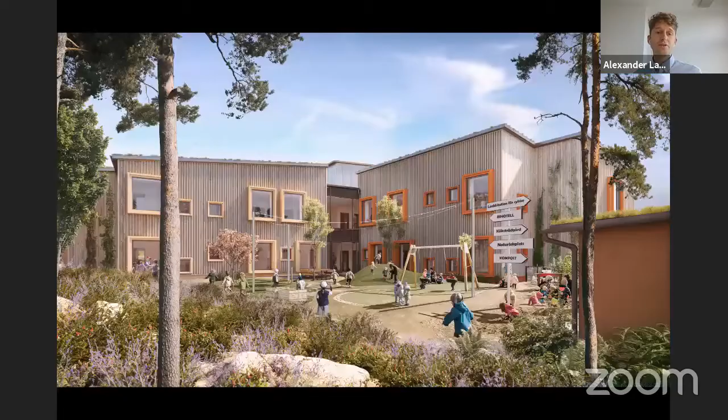And that's one of the reasons why we at Link Arkitektur have focused a lot on timber buildings the last couple of years, because we believe that timber is a renewable material that is a very important part of the building sector of the future. This is one of my favorite projects, which is called Hoppet, which Elsa will talk more about later on. It's an experimental project where they try different types of materials with low carbon emissions. And it's also an inspiration for the rest of the project developers in Sweden. Everybody has their eyes on this project because they want to see what's working and what's not working.

This is another project that we have done at Link Arkitektur, a little store outside Sigtuna. It's mainly built out of glulam timber and also cross-laminated timber. And I think it reminds us also that architecture needs to be beautiful. If you want to have a building that lasts for 100 years or centuries, the architecture needs to attract people for us to love it, to let it stay there. And this is one of the pictures being built right now as we speak.

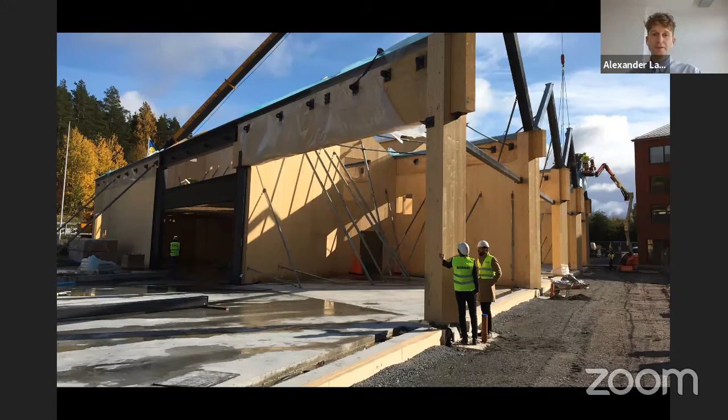And the energy use is something we've been focusing a lot on the last couple of decades, and we've been able to reduce this circle a lot. So what we now need to do is focus on the building materials, because the fact is that we don't know much about how to reduce the climate impact from this part of the building, because there's very little research done on it.

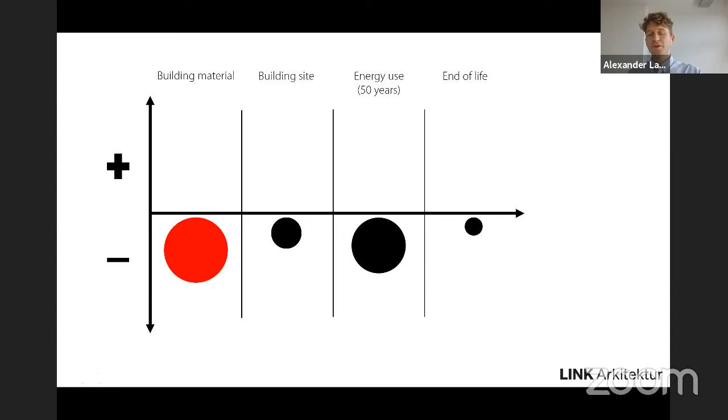So how do we begin doing that? Well, I think a great way is to use the Pareto principle. It states that for 20% of the effort, you get 80% of the results. So I usually don't encourage people to start with everything at once. If you want to build a climate smart building, don't start with all of the building components.

It's the same with sales. Usually 20% of your customers stand for 80% of your income. So this principle can be applied in many things, and it's also true for the climate impact of a building. So you need to focus on the foundation and framework first. Don't ignore these parts, of course not. But if you're just getting started, then you put your energy where you get the most results, where you get the most bang for your buck.

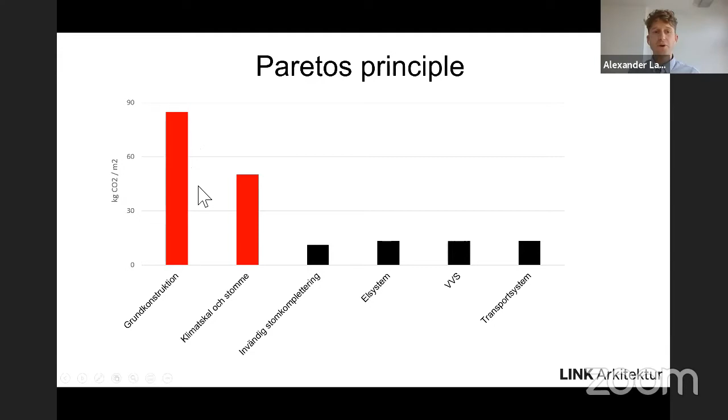And that's exactly what we did for this project. This is Little Visby outside of Gotland, which is Sweden's first NollCO2 certified building. It's almost completely made out of timber. We're using cross-laminated timber, glulam, and we're also using LVL. But there's two things that are unique with the project.

The first thing is that almost all of the materials inside this building have been accounted for and their carbon emissions measured from a product-specific EPD. So we know exactly how much carbon emissions they release. And the second part, which is really interesting, is that we used a carbon budget for this project, the CO2 budget, of 300 kilos of CO2 per square meter. And the same way you use a financial budget or you have a time budget in your project, every project should also have a CO2 budget.

So how do we get the target of 300 kilos CO2 per square meter? Well, in this case, it's taken from a baseline case where a standard building in Sweden has a climate impact of 550 kilos of CO2 per square meter. And then the thought process here is that you almost halve that and you get 300, and that's then in accordance with the 1.5 degrees goal from IPCC. And actually these numbers have been updated since we worked with this project, but this is what we used.

And of course, always when you have a target, you want to have a safety margin, right? So what we did was that we said, okay, we want a 20% safety margin so that we know that we can reach this target or below this target actually. And we far outreached the target. The building had a climate impact of almost 180 kilos of CO2 per square meter, which is a very low climate impact for a building.

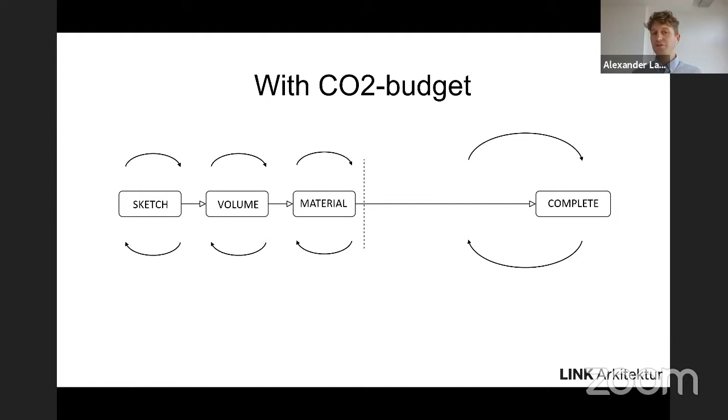And actually, another thing is that the learning process is very low, because the ones that actually can impact the climate emissions are the architect and the construction engineers and the other consultants, and they're not part of this feedback loop. So that's why when you use a CO2 budget, you're forced to do continuous LCA analysis during the project. And you have to ask yourself a question when you start a project: are we able to reach this CO2 goal that we have? If not, well, what changes can we do to our sketch? And that's exactly what we did.

Less materials means lower CO2. Less volume means that we don't need to heat the building as much, or cool it for that matter. So it's a win-win situation.

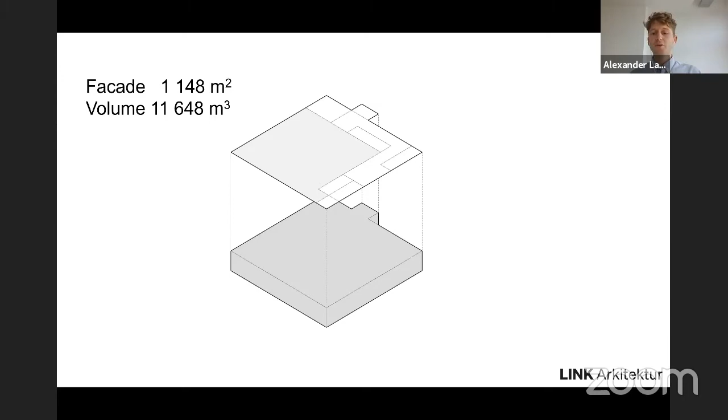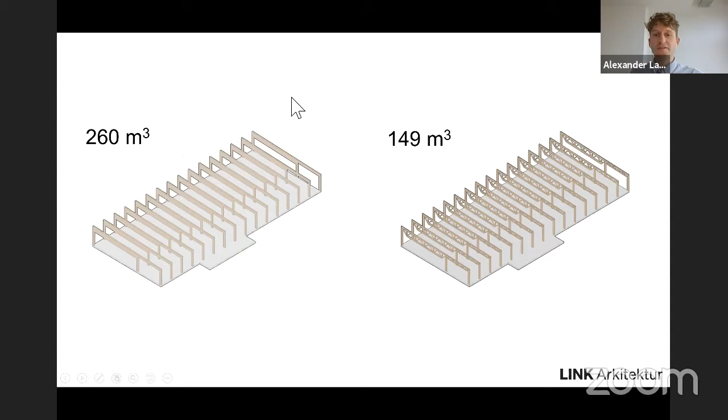I think these types of analysis are amazing if you can do them, because many people believe that climate smart always means more expensive, but actually climate smart and cost efficient are intertwined. I mean, if you reduce the materials, the cost will also be reduced, hopefully. Not always, but in many cases. So that's why they're intertwined, and I think that's important to remember.

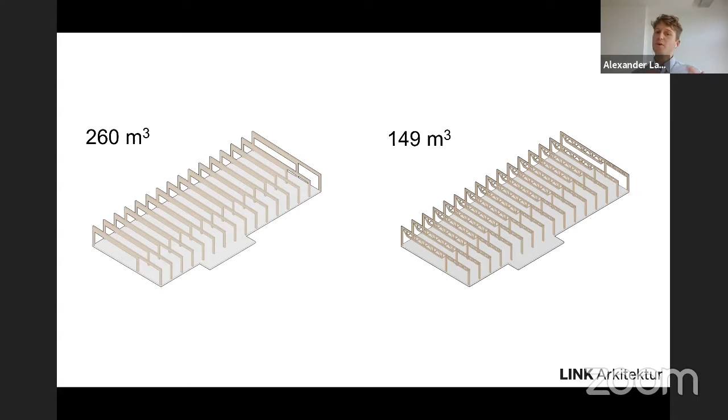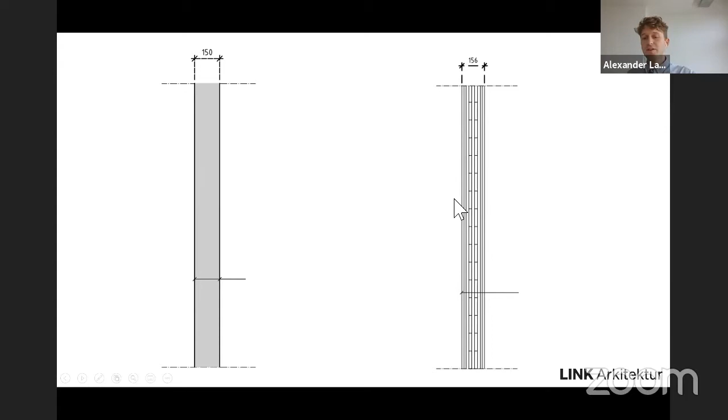This is what a regular type of LCA analysis looks like in many projects. It's very simplified. You have a concrete wall to the left and you compare it to a timber wall to the right. But you can't do this, because there's always materials that need to be added to the different types of constructions, right? So in this case, this is a more accurate analysis where you can see that you need to have a lot of gypsum for the timber wall to protect it from fire. You need to protect it from moisture, the acoustics, so there's a lot of materials that need to be added to the wall.

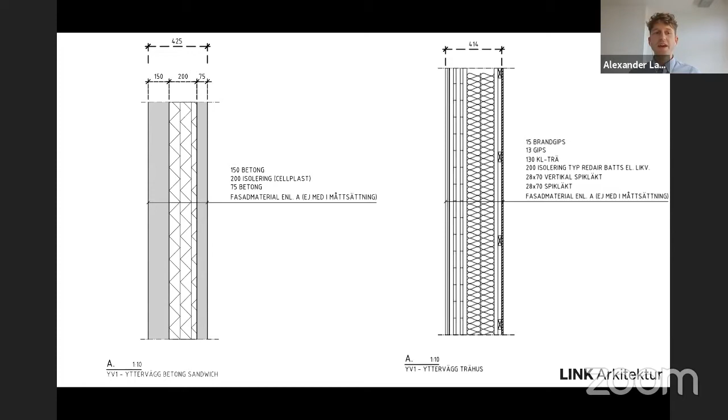Now, this is a more reasonable comparison of these walls. And this is perhaps something that we do more often, but I would like us to take the next step and understand that this wall is part of a system. And that system is, of course, the house or the building. And this wall will impact the whole system. So let me give you an example.

In this case, we have a concrete building to the left and a timber building to the right. Now, the concrete weighs approximately 5 times more than timber. And that means that the building, of course, is much heavier, which impacts the foundation of the building. This is nothing that we saw when we used to compare the walls together. So there's a synergy effect of using the timber wall: we can have less foundation. Now, this is an oversimplification and it's not always true, but in many cases it is. And using less concrete and steel in the foundation also means less costs for the project developer and also less CO2 again.

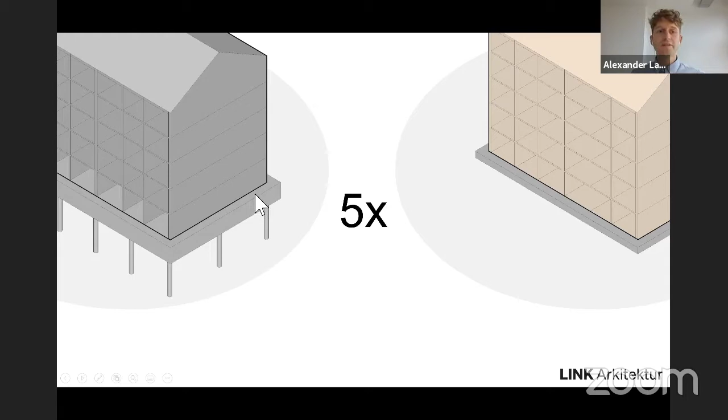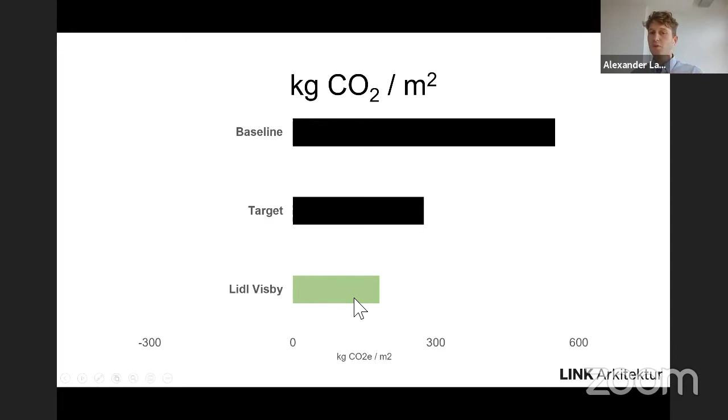So this is a breathing pause for everybody. Actually, it's not. It's used to symbolize that timber breathes CO2, unlike us. And this is a great potential that we should try and tap. And if we look at the graph we saw earlier for the CO2 that's stored within the timber, then we could argue that the building actually has a negative climate impact.

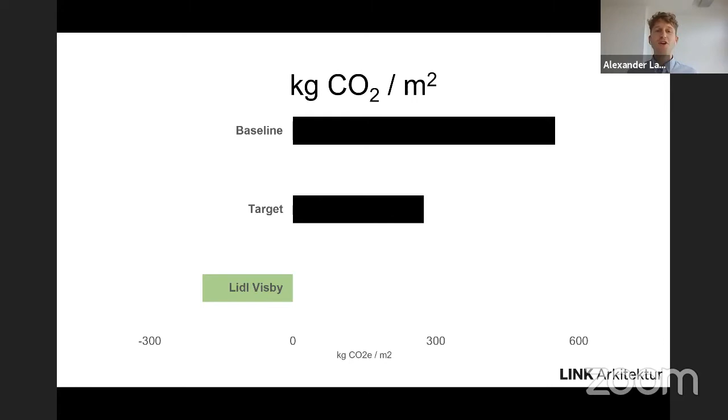And this is a concept that I think we definitely should explore further, because that means that our buildings could become part of the solution and not part of the problem in the climate change debate. I mean, which sector has that possibility to be part of the solution instead of part of the problem? Our buildings could be carbon sinks. And I think that's a fantastic opportunity that we should explore further.

Other things that we can look at early on in the stage is, of course, the angle and optimization of the roof and orientation of the building to optimize it for photovoltaics or solar cells. In this case, by simply optimizing the roof, we get an increase of 60%. And the buildings might look like this.

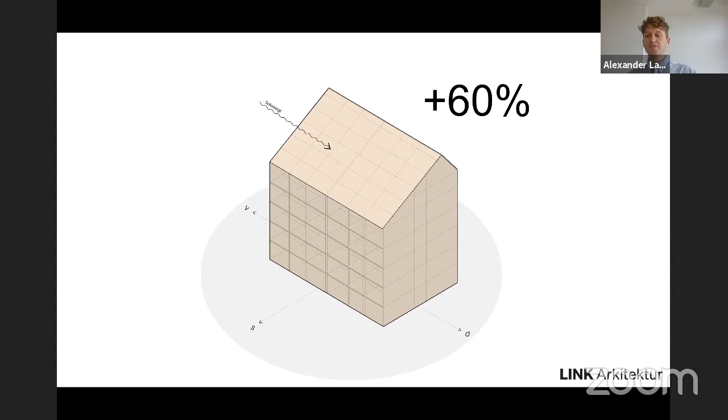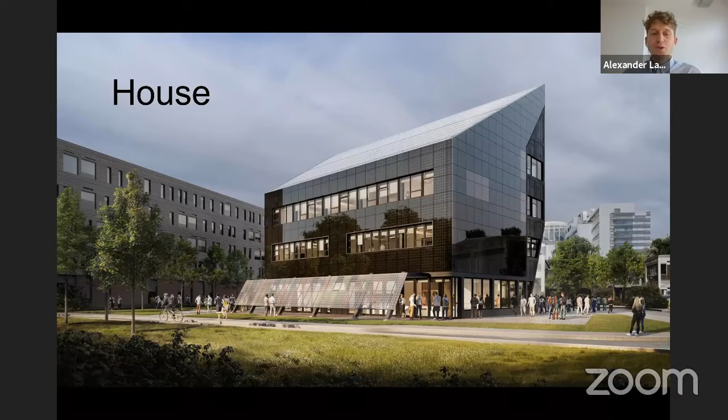I don't know, what is this? Is it a house or what is it? It's actually one of our projects in Norway. I think it's really cool. It's called SEB Flexible Labs. And it uses photovoltaics almost everywhere and has very low carbon emissions.

Let that sink in. Many people believe there's an energy problem, lack of energy. There's not. It's absolutely the other way around. And we should just start tapping out this energy as much as possible. And perhaps not build houses, but start looking at it as we're building power plants. And yet again, this building is producing more energy than what it is consuming. So perhaps you could see it as part of the solution and not part of the problem.

And that's what I want to leave you with here today, that we need to change the concept of how we look at buildings. Don't look at them as problems, but look at them as part of the solutions. Which other concepts can you think of? But I think it's amazing to think that our buildings could be carbon sinks and also that they could be power plants. And I'm going to stop share here.

And I just want to say one last thing, and that is that I understand that many of the things that I've shown you here might not be trivial and not be easy, but that's not why we're doing it. We're doing it because it's hard and because we want this challenge. We're doing it because we want to build a better future. And I promise you that if you do this, even if you live in Scandinavia and it's November and you wake up and you're trying to achieve a better future, your day will be bright. Thank you.

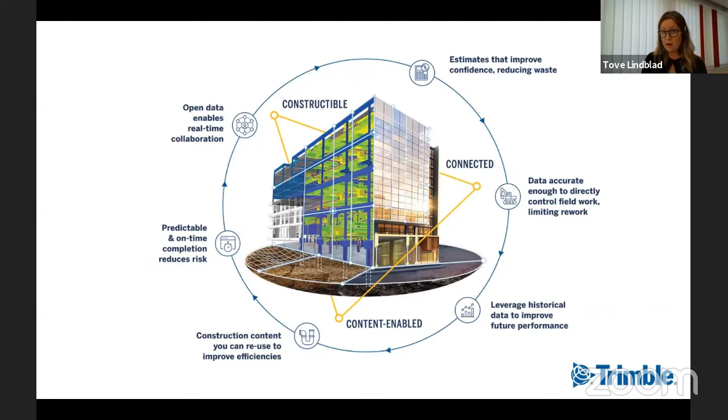This image serves as a visual image of how we see the life cycle of a building. And of course, we do have similar pictures for infrastructure. The process begins first with a plan, and here starts your opportunity to think and to work with sustainability. Early design optimization has the highest impact on carbon saving potentials and at the lowest cost.

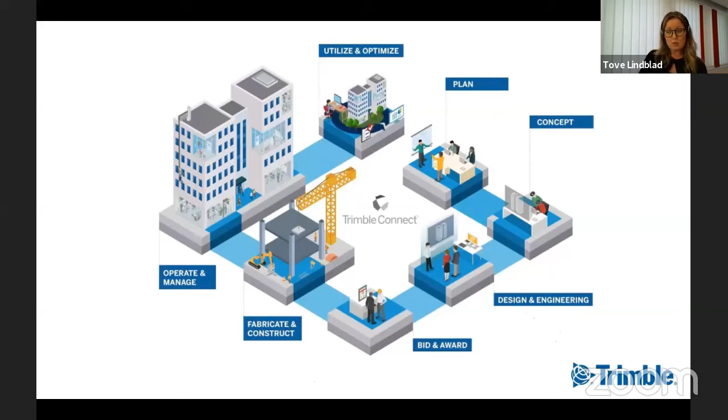Architects and designers can reduce projects' embodied carbon by 80% in the early stage, normally. However, you need accurate material quantities to have a sound carbon reduction strategy, and that's normally challenging in the early stage. And like I said, and also Alexander, it is in the early design stage, during the conceptual design, that you can make the highest impact on the carbon saving potential.

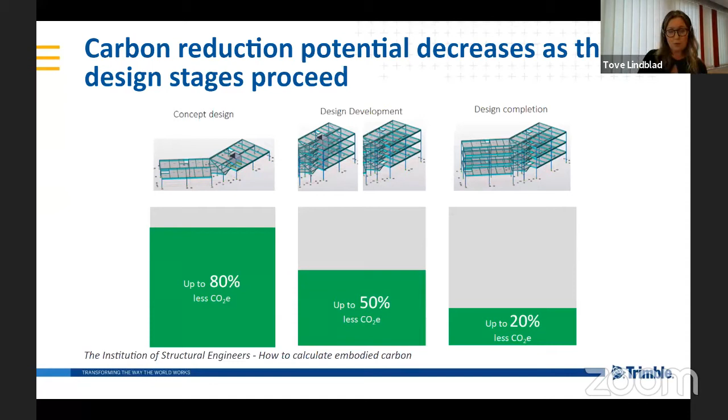The integration between Tekla Structural Designer and One Click LCA helps you to get those material quantities much faster and more accurately. With this integration, you can actually export material quantities from Tekla's early stage models to One Click LCA and get a life cycle assessment in minutes. You can then compare the embodied carbon of different early designs and find out the most eco-efficient solution.

We have, together with One Click LCA, a mutual understanding between us, and this is a stepping stone on a longer journey together. You will get a complete picture of the whole life carbon and other impact indicators. With the modeling in Tekla Structural Designer, you have the measurements of the building quantities, and you do have the profiles, and then you push the data directly into One Click LCA for different LCA options. No manual steps are needed, and that makes it very beneficial.

I would say that LCA answers one simple question: how sustainable is my building? Or why not product or process? We know products are not equal in terms of their environmental impact, and putting a number onto that can be hard. LCA is standardized. It's a science-based tool and is quantifying the impact, answering the simple question, how does my building affect the environment?

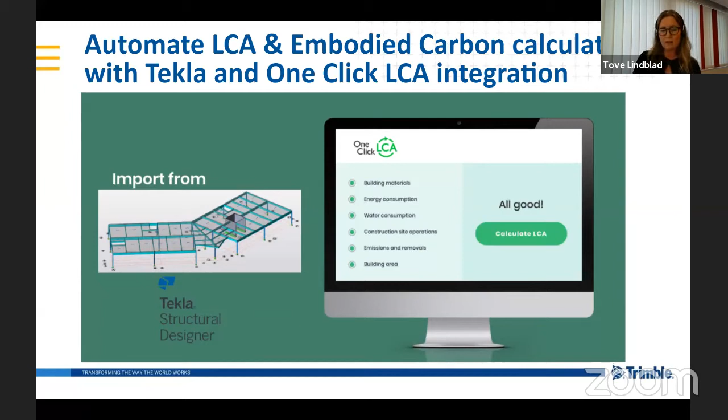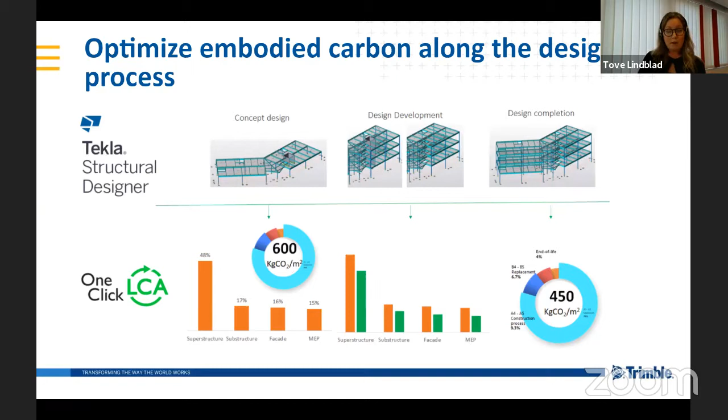As you can see here, you can focus on the hotspots in the building structure. Alexander mentioned the product stage, the floor, the foundation, and so on. It's the heavy part. And as you can see in the diagram, the light blue is for the product stage: raw material, transport, and manufacturing. You have the second phase, the darker blue: construction, transportation and installation process on site.

You have the use stage, where you have maintenance, repair, replacement, refurbishment, overall energy and water use. And then you have the end of life: the deconstruction, the transport, waste, and the processing. The graph just states the % of the embodied carbon coming from the whole life cycle stages of the building. Eco design would decrease the total embodied carbon, but would not necessarily change the percentage, because this is how it looks.

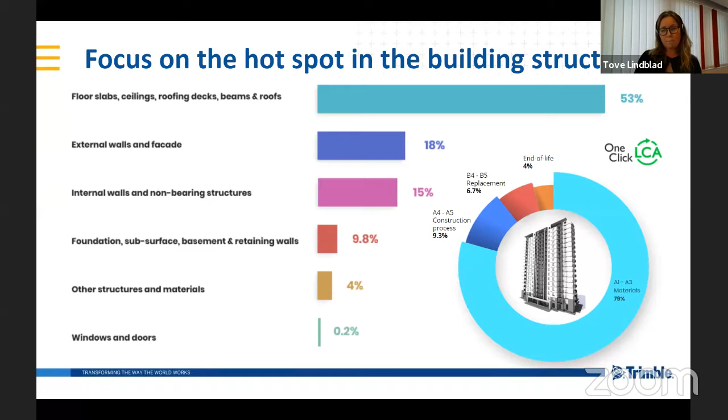As well, we have the climate declarations, and to optimize material, you use the LCA, and you optimize for different frame options, material options, supplier options, manufacturer options, and as well minimize the emissions. You can also reduce waste with constructible BIM models, and you are the key to change if you take that step. So, a constructible model provides sustainability.

What are the changes that are required? How can we work today? We build for 100 years at least, and that's something we need to have in mind. Can we assume that the function in the building will be the same? Will there be reconstruction? Will there be some other building management? So the decisions made during the journey need to be considered.

And with Tekla, you have that. You have the constructible model. It's so accurate, you actually can build from it. You can use the model to reduce the consumption of raw materials. The wastage is reduced or actually eliminated completely. You can build with a limited number of drawings, or why not no drawings at all. You use real-time product views instead. That's also sustainability. So there is no reason not to use the constructible model to work with sustainability thinking.

And for the property owner as well, it's very important to know what's inside the building, not just the exterior cosmetics. You need to know exactly the richness in details, so you know what the whole building includes. The building is what's inside, of course. We talk about EPDs, which you can produce easily with models, and it's complete. So a model-based workflow can give you a whole lot of benefits throughout the life cycle.

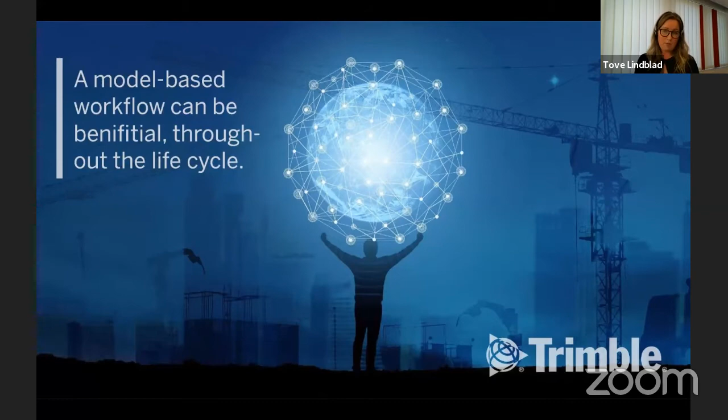Your mic, Karin. Sorry, can you hear me now? I'm sorry, I didn't unmute myself. Thank you, Tove. Thank you very much.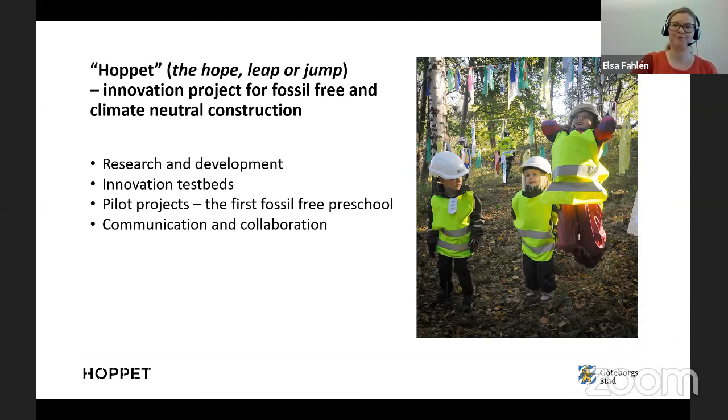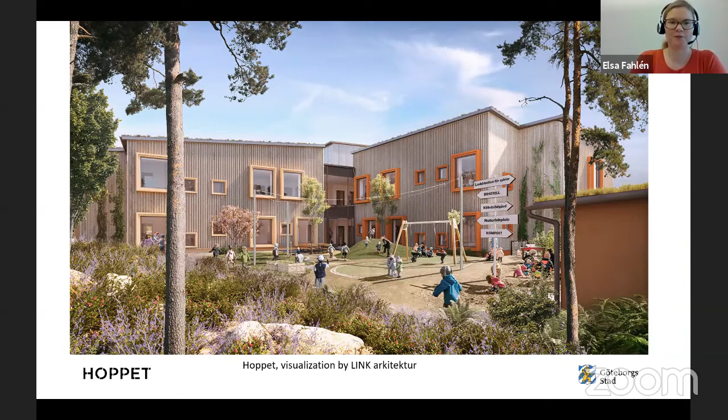Now I will show you some of the solutions in the first HOPPET pilot project. This is the preschool visualized in this picture. I will start with the foundation and framework. As Alexander and Tove talked about, the foundation and framework correspond to the major part of the embodied greenhouse gas emissions for a building. Instead of using a concrete slab, we have used building elements based on a steel frame and cellular glass insulation. This insulation comes from up to 70% recycled glass. Actually this week, these elements are lifted in place and assembled. We have also chosen a framework mainly based on wood.

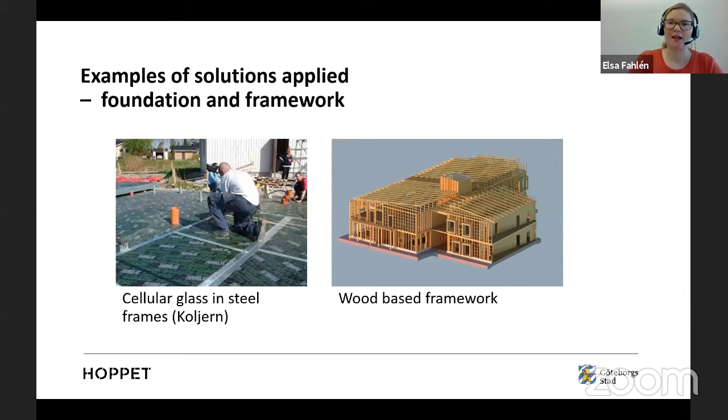This is the resulting climate impact for the main building parts of HOPPET: the foundation, framework, and roof construction. For the main building parts, we see that we can have a 70% climate impact reduction compared to a reference preschool, representing how we normally build. If you want to look deeper into the calculations, we presented a paper this Monday, and I think the paper can be found at the Beyond 2020 website.

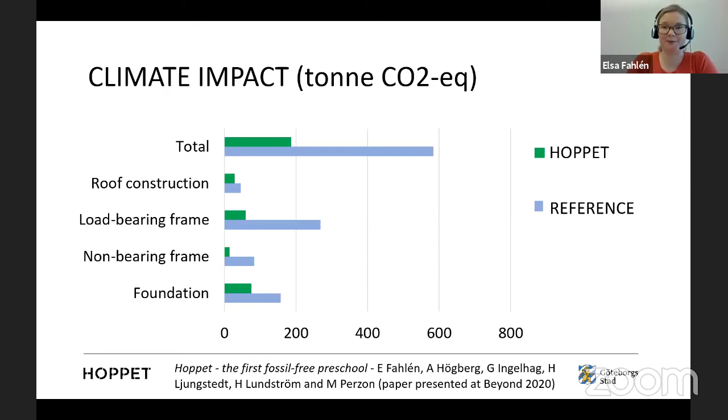One of our strategies to build fossil-free is to reuse products and to use products made of recycled materials. For instance, we use plastic pipes made of installation waste. Another example is that we want to reuse construction elements as foundation for the complementary buildings at the site. For instance, we want to reuse hollow core slabs.

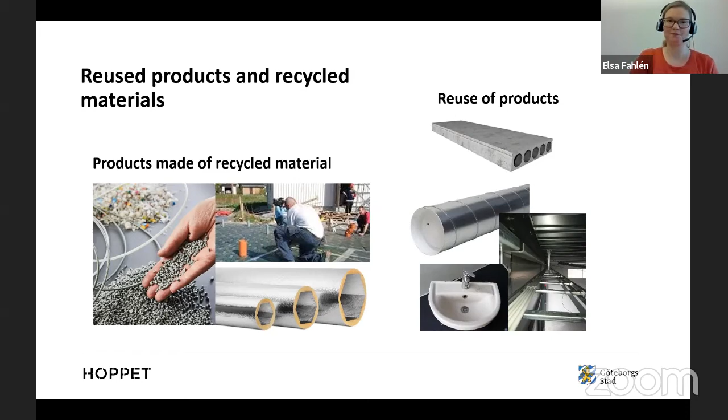Now we have come to the most innovative parts in this project. We realized that we need more options when it comes to building materials. Wood is a big contribution to why we can reduce the climate impact so much for the major building parts. But wood is needed for many different applications, and there is not enough wood for all buildings. There are 3 complementary buildings at the site that we will use as test beds for materials that are not very well established in the Swedish construction industry today. We need smaller tests and validation before upscaling these technologies to full-scale projects.

We will build one of the buildings with hempcrete combined with bearing elements of wood. Hemp grows fast, also in Swedish conditions, so there is potential for local production. Hempcrete is a material with many interesting properties, for instance when it comes to acoustic and thermal properties, and it also buffers moisture.

In one of the buildings, we want to use building bricks made of as much as 90% demolition and construction waste. Today, these are manufactured in Scotland, but there are ongoing discussions to start manufacturing also in Sweden using Swedish waste. And regarding technical properties, these bricks are similar to normal clay bricks, but they only have 10% of the climate impact in comparison.

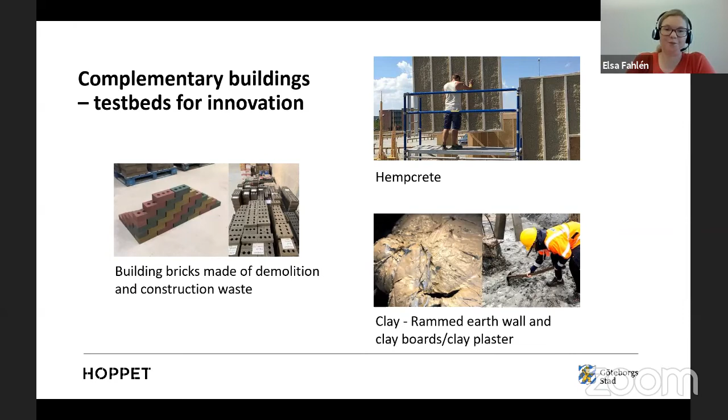To sum up a little bit, we have taken a giant step ahead with the first half of the preschool, but we didn't quite reach the goal. But even if we found that it's not possible to build 100% fossil-free and climate-neutral yet, we have found that it's possible to reduce greenhouse gas emissions for major building parts by as much as 70%. And with this project, we think that municipalities can show the way. And for now, we conclude that there are solutions available today with considerably reduced climate impact that can be implemented directly.

Another low-hanging fruit is to reuse products and recycle materials even more. And we have to develop the processes for this so it becomes easier and cheaper to reuse instead of buying new products. And finally, we also need more research, more innovation and cooperation to become 100% fossil-free. And therefore, the innovation project Hoppet will continue. So if you're interested, you can read more on our website.

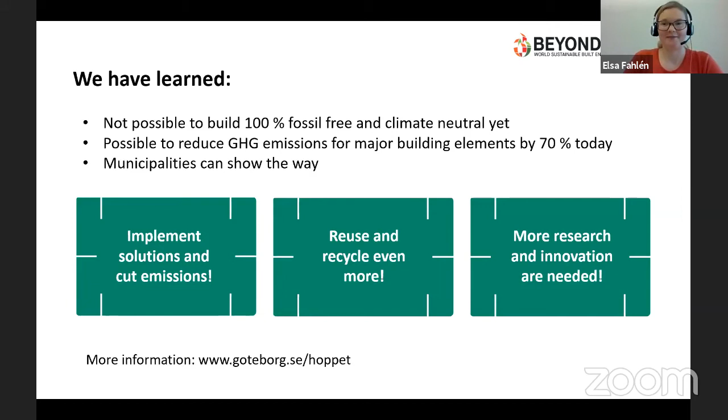Thank you very much. Thank you, Elsa. Thank you very much, and thank you all. I can see that we have several questions, both large scale, almost on the ideological perspective, Trump or Biden, and the very specific. So I'll just try to find a mix here of really curious questions. I wish we had more time. But I'll start with you, Alex.

According to the IPCC, we only have 7 years left to meet the 1.5 degree target. Are we too late? Why are you so pessimistic or optimistic? No, I'm not sure that we're too late, but I think we humans usually think in a linear way, right? So we think that it's only 7 years away, and that's not so much time actually, and you might be daunted by thinking it's only 7 years, but you need to realize that the solution to this is you have to think exponentially.

So if we can make our buildings carbon sinks and powerhouses, then sure. We're not talking about incremental change like 10% each year, we're talking 10x change. And if you talk 10x, then I don't think it's too late with 7 years away. But sure, if you look globally, it might be a very daunting task to take everything on you at once. But I think you need to focus on what you can do and do the best you can with what you're working with.